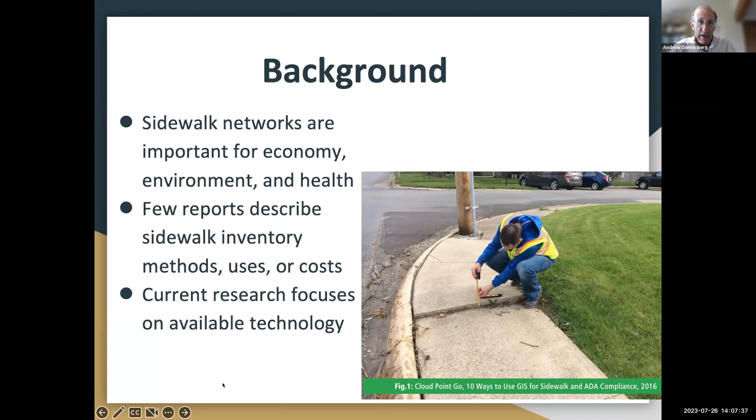Thank you. Thank you very much, Andy.

So again, I'm Aaron. The research questions that this background and process produced are: what are some of the best practices for conducting a sidewalk inventory? Why are inventories conducted and how are they used? What methods produce the most complete and accurate inventories? And what are the costs associated with them?

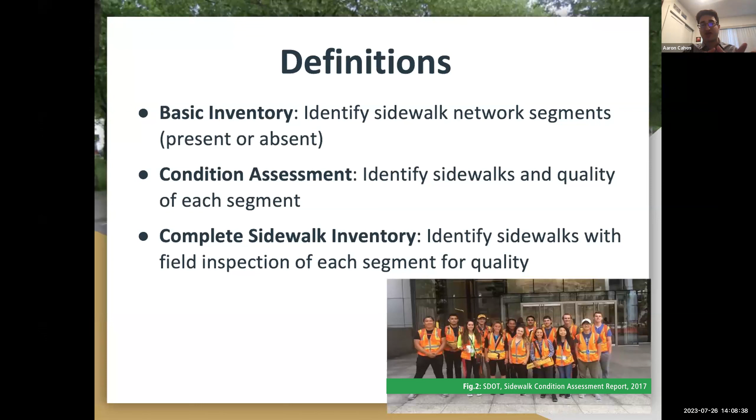To ensure that we were comparing apples to apples, oranges to oranges, we came up with a few definitions. The first is a basic inventory, where you go around and identify whether or not there is a sidewalk there. Then a condition assessment takes it a step further - you're not just identifying where there is sidewalk, but actually looking at the quality of each segment, how damaged it is, how accessible it is, etc. And then finally, a complete sidewalk inventory really identifies, with field inspection, each segment of the sidewalk for quality - so it's a condition assessment with actual people on the ground going to each segment.

Now, in order to conduct this research, we had a few methods. First was a literature review, trying to identify what research is already out there, what inventories people are conducting, and how they're conducting them, which again found that a lot of the focus has been on what available technology there is and new emerging technologies, rather than on the actual methodologies for conducting and then using these inventories. We did some internet searching using various geographical filters to try to identify what information there was actually out there on the inventories that's publicly available.

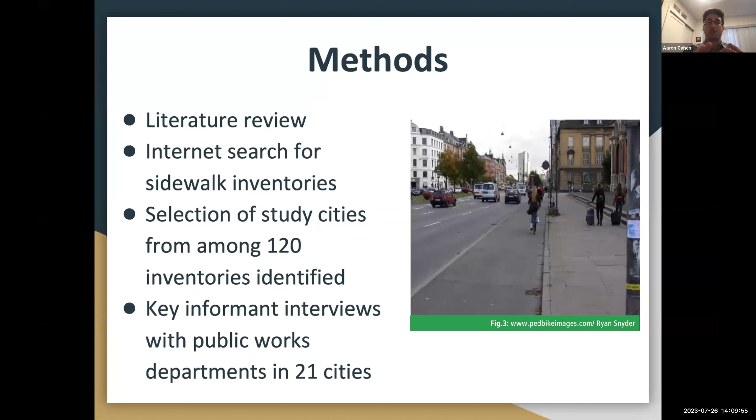And we found about 120 across the country, ranging from large to small cities. And we selected from there, doing a kind of geographic and size filter, in order to come up with about 21 cities that were representative of the geographic and population densities across the US. And then finally, we conducted some key informant interviews with public works departments in these 21 cities in order to actually understand how they were really doing this, what they're using it for, the costs, and the challenges.

Now, some of the methods we found range from things like mobile LiDAR, which is effectively either a Segway or a small motorized device that has a LiDAR machine on it that sends out signals to measure each piece of the sidewalk that it rolls over. You have people, as you can see in the bottom left, using an app, whether that's Esri or some other locally designed app, to actually go out and measure sidewalks and collect it that way.

Some places have just used satellite or GIS data to base their maps off of. And other places, similar to app-based collection, instead of using a digital app, use a paper form that is generated locally.

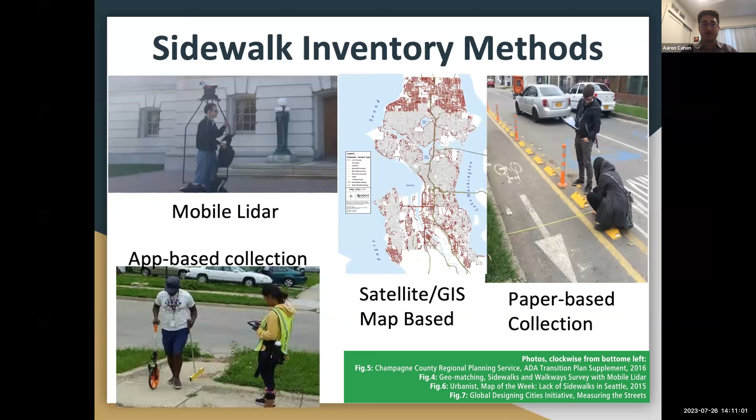So when looking at these different practices, we came up with 3 categories for comparison: the accuracy, the labor intensity, and the time requirement. Now, three asterisks means a greater amount of this, with 1 being less.

We found that the most accurate is going to either be field observers walking with tablets, since it's easier to collect with a digital tool, or field observers using a Segway or some other vehicle with LiDAR attached to it. These are both the most accurate, but the field workers method is going to be more labor intensive and thus a higher time requirement, while LiDAR is less labor intensive and less time requirement with just as much accuracy.

The main caveat with LiDAR is that, as many of you are aware, it can be rather expensive to access. The next rank of accuracy was using GIS and satellite data for areas they had that data for, then substituting in some field observer work to supplement that.

That has less accuracy just because when you're using satellite data, trees obstruct sidewalks, and cars, if they did say a Google Street View, are going to obstruct the view of the sidewalks. Without people actually there measuring, it's much harder to assess the condition. That's why the accuracy is less, but there is still a fair amount of accuracy, labor intensity, and time requirement.

And then the last two are GIS satellite data without field observers. Again, for the reasons I've just said, this can be challenging in terms of accuracy, but it is a lot less labor intensive and requires a lot less time.

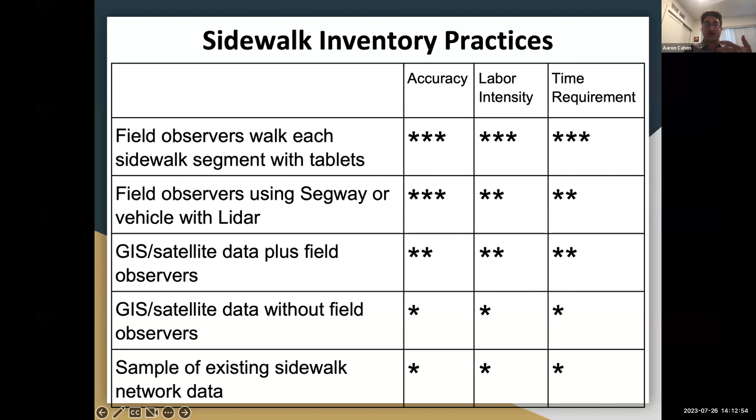And then same with sampling existing sidewalk networks. What some places have done is look at the existing sidewalk data and sample from it to try to establish what the network looks like across the city, which is not very accurate, but also doesn't take a lot of time and resources.

So that being said, we then look at what is the actual value of these resources, of these networks, of these inventories. And really, they are critical for equitable sidewalk networks, both the construction and the maintenance.

A lot of cities have previously relied on 311 calls, where someone calls and complains and they come out and fix it. Networks allow for that to be replaced by providing objective data on where sidewalks are and what condition they're in. With that in mind, they are really necessary to identify gaps in the networks and meeting ADA compliance about how wide your sidewalks are, what quality they are, and whether or not they're accessible.

And then finally, it also really facilitates active transportation to access services by making communities more accessible for those who are less physically able, or those who may not have a car or may not want to use one.

Now, one of the barriers that we found, at least in terms of positives, was costs. We actually found that there is a pretty significant range between about 86 and 826 dollars per mile of road in the 6 cities that provided data for this.

Now, this depends a lot on whether you are doing an inventory or a condition assessment, and whether you are doing this in-house or hiring a third-party contractor. Those tend to really focus in on where those cost variations come from.

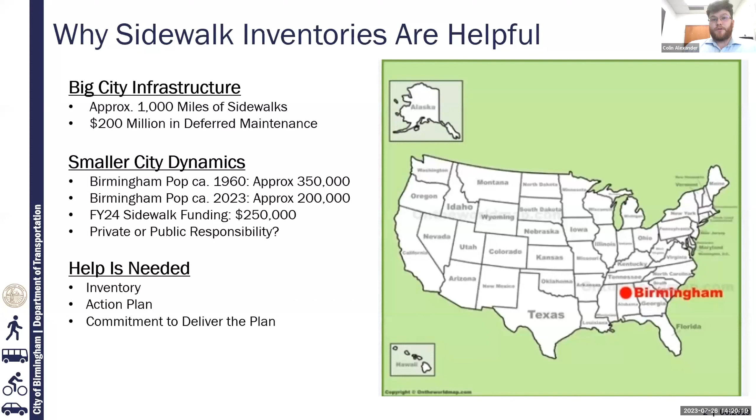This is why inventories are important for a city like Birmingham. We really need an inventory to understand the scale of what we have, both in terms of infrastructure and its rate of deterioration. That inventory, in order to be successful, needs to lead to an action plan identifying how we can use our limited funds, because otherwise we spend all this money on an inventory and nothing gets done since we have such limited funds to actually address the problem. And that also needs to be backed up with a commitment from the city to deliver on that plan, in terms of funding and in terms of priority commitments.

So, past efforts in the city of Birmingham: before 2015, like Aaron was talking about with other cities, our sidewalk repairs were prioritized by 311 complaints or field inspections. It was sort of a whack-a-mole approach. You get a call saying I need this sidewalk fixed, you go out and spend what money you could to fix that spot. It's not very effective, obviously.

So we decided in 2015 to invest in a sidewalk master plan. That sidewalk master plan included a sidewalk inventory process. The consultant walked each of our city streets and, using a hand paper plan, gave good and poor rankings for entire blocks. It's not very detailed in terms of telling us this corner needs to be addressed, but it gave us a sense of which corridor we need to address.

From that, the plan developed priority corridors for Birmingham's 23 communities, and divided those priority projects into short, medium, and long-term projects. Short-term were supposed to be completed in 0 to 5 years, then 5 to 10, and then 10 plus years.

However, there are a number of challenges that left us with. The first, of course, is inadequate funding to implement. We just never fully funded the kind of projects that we needed in order to capitalize on this sidewalk inventory and this master plan that we developed.

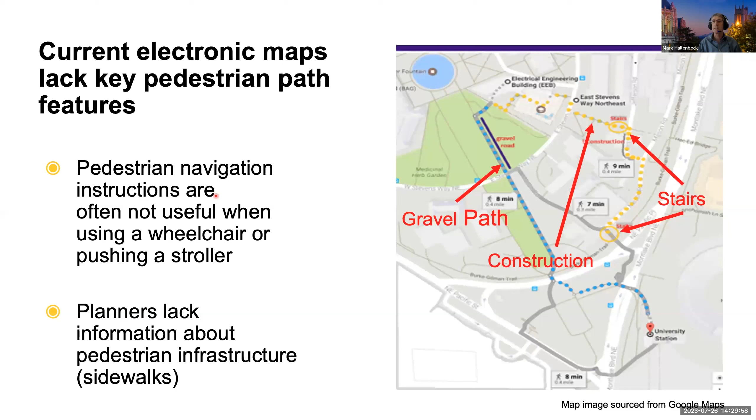As a planner, I have no information to be able to make the decisions you just heard about that the city of Birmingham is wrestling with right now. Where do I put my money? How do I put it in? How do I prioritize? Our project, the Transportation Data Equity Initiative, and specifically the Open Sidewalks Data Standard, are designed to really help that process.

We do that by saying we want a standardized way to collect routable transportation information. We want that information to be detailed and connected. Most of the inventories you heard about are asset management databases. They have a geographic portion, and the geographic portions are not directly connected. So you don't know that I can go from this sidewalk to that sidewalk, or that I have a curb ramp at this particular location that is connected to the sidewalk that leads me down to the street, and I can cross the street at those particular points.

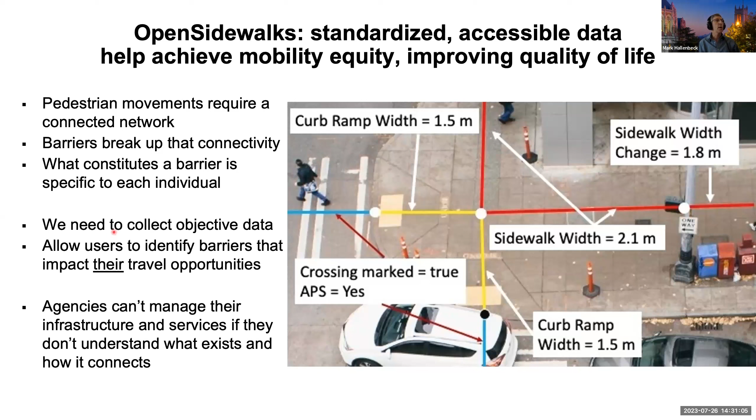So as you start to think about collecting your sidewalk data, we really encourage you to use the Open Sidewalks data standard as a way of building the underlying network to which you attach all that wonderful inventory data. In doing so, we want to make sure that you collect that inventory data in an objective fashion, and that you can use that to manage the information that you have.

So when we say objective information, what we don't want you to say is this is accessible or it's not accessible. The reason is because what's accessible to me may not be accessible to you. Even someone in a wheelchair - some people in wheelchairs are very happy to hop curbs, others want nothing to do with hopping curbs. Whether the height of your wheelchair tells you a side slope is actually dangerous to you, you can tip over, or whether it's not a problem to you.

So we don't want just someone to say this is an accessible sidewalk or this isn't an accessible sidewalk. We want you to be able to say there is a curb ramp, it is 4 feet wide, there are tactile delineators on it, so in case you are a blind individual, you can understand that there is something here that you need to be aware of.

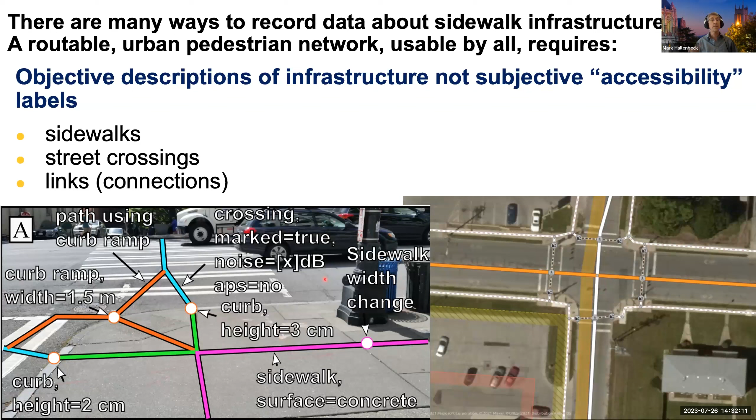In that realm, Open Sidewalks is what an old man like me calls a link node network, or if you're a modern computer scientist, it is a graph network. That is, you want it to be a transportation network, not just an inventory. When you do that, you have the opportunity to build routing into the system.

So this is a display of something we have built to take advantage of the Open Sidewalks data network. It is a personalized routing application called Access Map, and it is functional wherever anyone has collected openly published Open Sidewalks data. It allows you to say something about who you are and what you need as a pedestrian. So in this case, I've said, hey, I need curb ramps, and there's steep slopes I can't go up those. I only want to cross the street when there's in fact a traffic signal there that I can take advantage of, and I really want crosswalks.

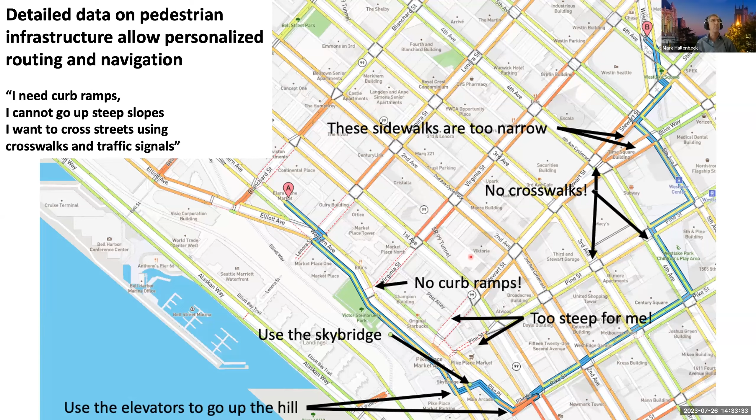Once you have that information, then in my world as a transportation data person, the world opens up. So the individual person is what drives our particular project. But if I want to improve that, I have to work in the environment of the city of Birmingham or any other county or city agency. So this is what we call a Walkshed graphic.

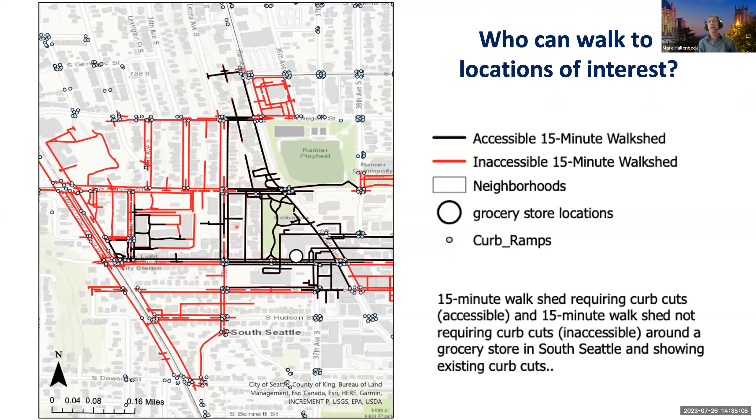Oh, look, there's no curb ramp. I could say, if I add that curb ramp, how many more people can walk or roll to the grocery store? Now I have a way of actually prioritizing where my particular improvements should be.

The other thing we can really see is if you're a planner, you often say, hey, everybody can walk. How many people can walk to this transit stop? Well, it's a quarter mile, it's a half mile. And we draw a big circle in GIS, because drawing circles in GIS is really easy.

When you actually place walk sheds on top of the map and say, this is where people can actually walk within a 10-minute walk shed - which is, by the way, about how long it takes people to go a half mile - suddenly you see that half-mile circle doesn't do nearly justice to who can actually walk to the 2 yellow dots here, which are our bus stops on the bus rapid transit line in Bellevue.

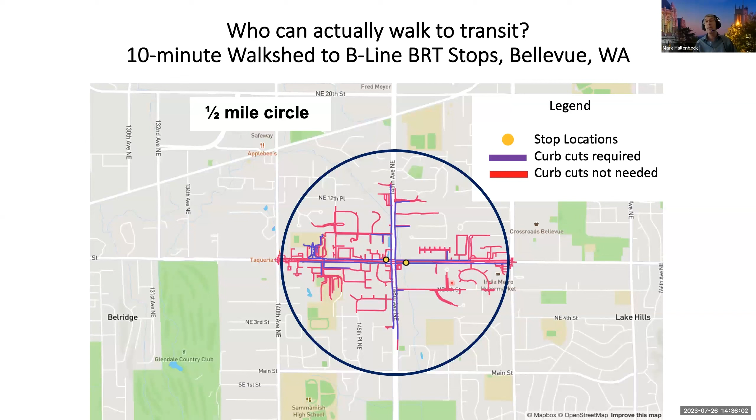Suddenly I start to understand who really has access to transit stops, grocery stores, parks, or health facilities, which allows the city of Birmingham to do those kinds of prioritizations. Hey, you want safe routes to schools? Who can actually walk to your school? How far are you willing to let them walk? What attributes do you want in your network in order to enable everyone to get to your school?

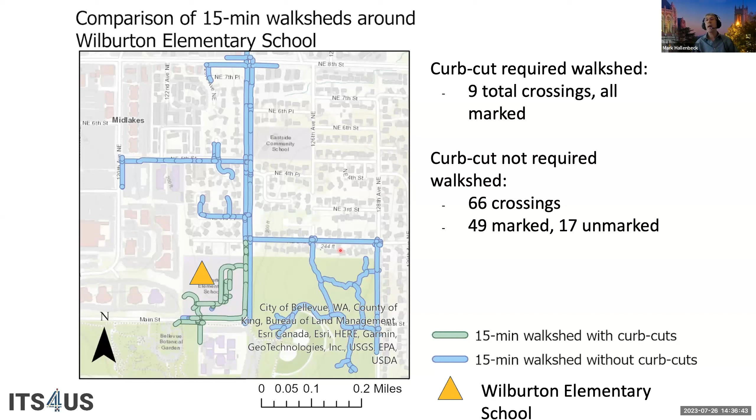Open Sidewalks is specifically designed to take that base inventory data and use it to route individuals, in order to understand the importance of particular features - who can walk, where they need to walk - and to understand not just the average individual, Mark, I like to think I'm normal, right, but people who have particular needs, which is really important as we move forward.